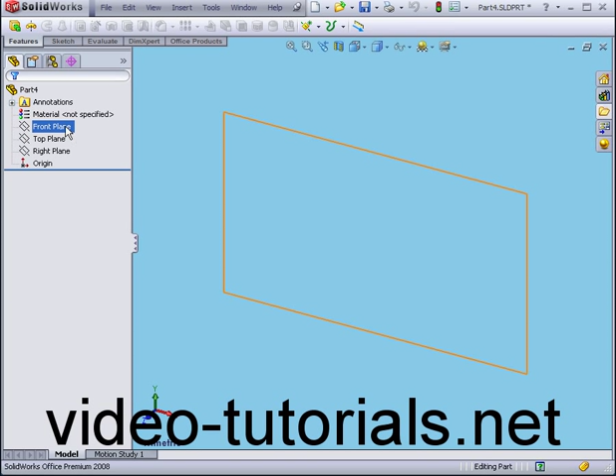First, I'm going to right-click, select Insert Sketch. Now let's activate the Line tool. And let's create a shape. Right-click, select. Let's use the 3-point arc tool now. Something like this. Right-click and select.

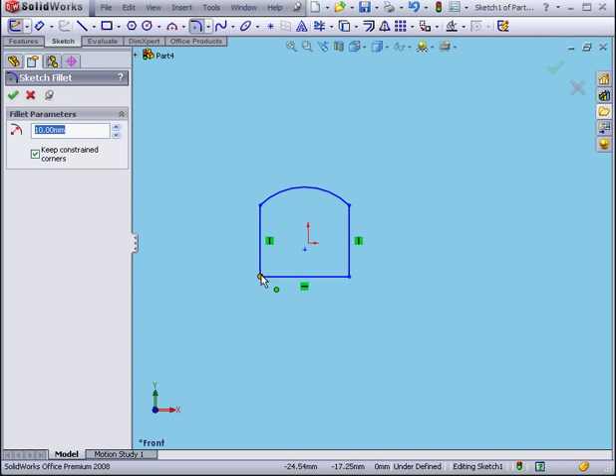Now let's apply some sketch fillets. A 10 mm radius will be fine. Let's accept. Now let's use the rectangle tool to create a rectangle. Under Options, let's check For Construction. Click OK.

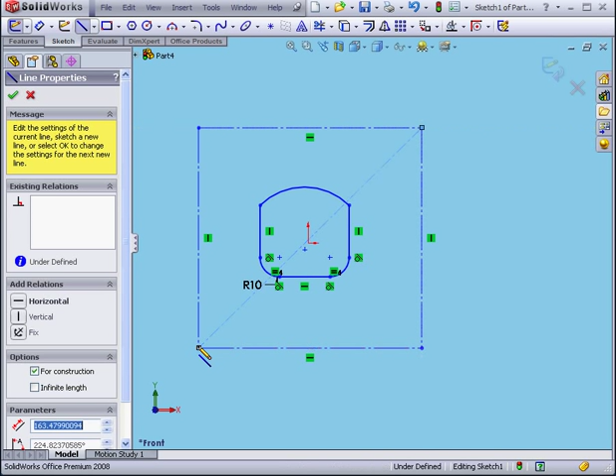Activate the Center Line command. Let's create a construction line between these two corners. Right-click, select. Next, Control-select the center point and the center line. We'll add a midpoint relation. Click OK. The origin point is now located at the center of the rectangle.

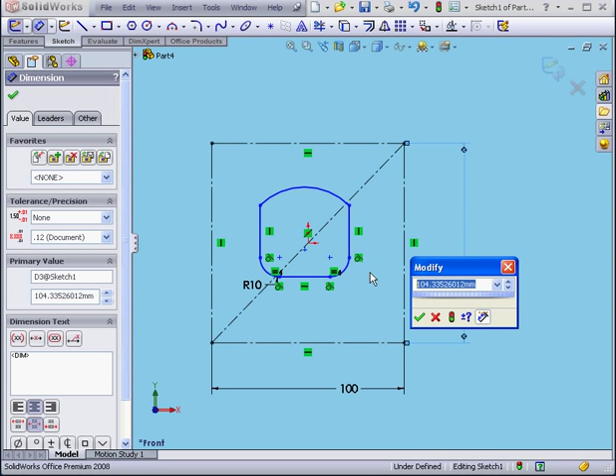Now we're going to apply some dimensions. This dimension will be, let's say, 100 millimeters. We'll make this one 120. Now let's Control-select this line, and we'll add a collinear relation.

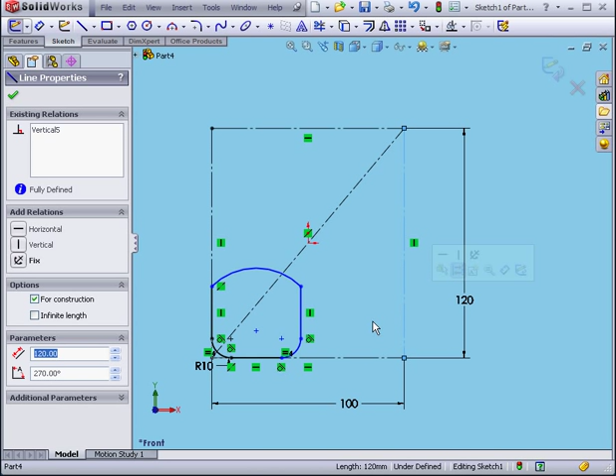Click OK. This line, and Control-select this line. Collinear. OK. This line, Control-select this line. Again, a collinear relation. OK. Now we'll select the arc and this line. We'll add a tangent relation. Click OK.

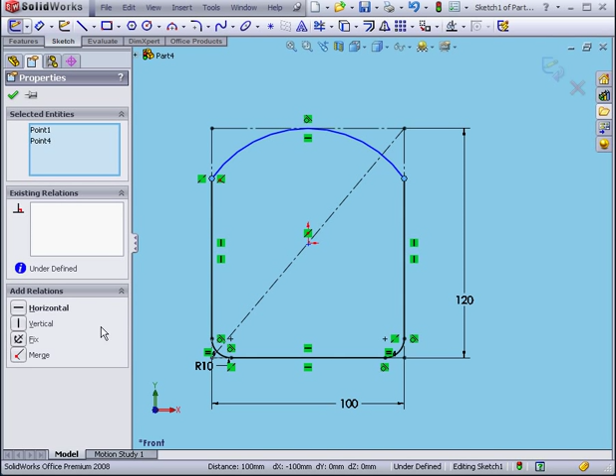Control-select these 2 points. Add a horizontal relation. OK. Let's add one more dimension. We'll make this 95 millimeters. Tab OK. Right-click and select. You see in this case that the construction geometry helped us fully define the sketch and also helped us to see how the geometric relations in the sketch were created.

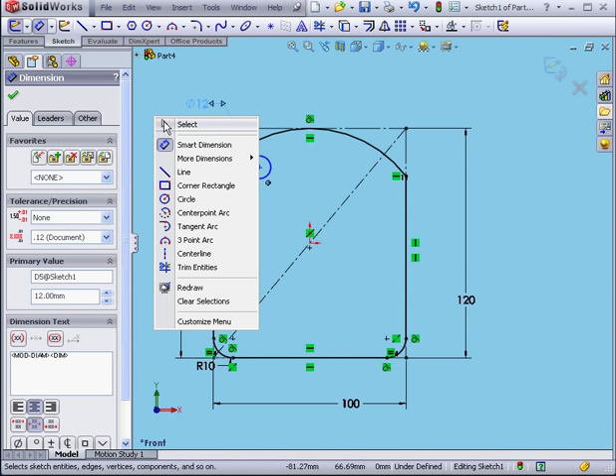Okay, let's create a circle. Right-click, select. Let's dimension our circle. We'll give it a 12 millimeter diameter. Okay. Right-click, select. Let's use the Center Line command again. Right-click, select. And let's dimension it. We'll insert an angular dimension here. 112 degrees. OK.

Right-click, select. Now let's Control-select this line and the center of the circle. Let's add a coincident relation. Click OK. Let's add one more dimension from the center of the circle to the origin point. You see here that the dimension moves based on where my mouse is hovering. When you're satisfied with the dimension's orientation, right-click and the dimension becomes locked. You'll see the lock sign on the mouse.

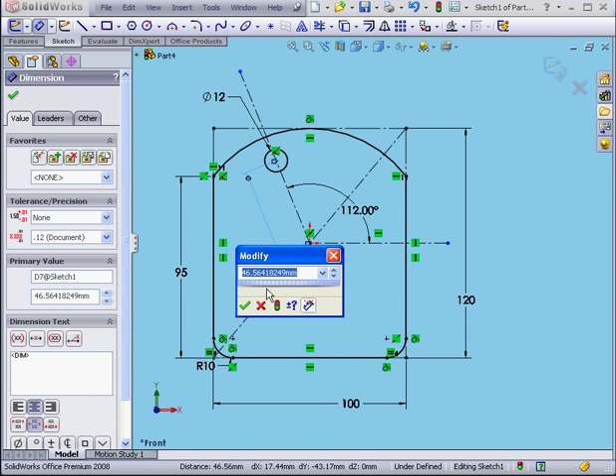If you want to unlock the dimension, just right-click again and the dimension becomes unlocked. Again, let's right-click. And left-click when you're satisfied with the position of the dimension. Let's enter 45. OK. Right-click, select. Now let's delete this angular dimension. Activate the Point tool. Let's drop a point right about here.

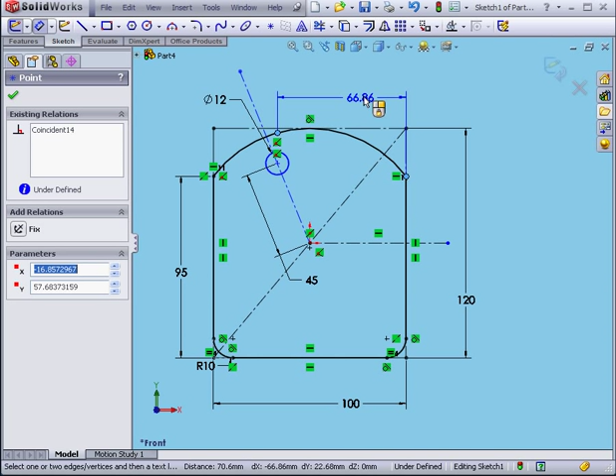Right-click, select. Let's say I want the position of this construction line to be driven by the distance along this line from this point. Let's activate the Smart Dimension tool. Select this point, and to create a dimension along this line, select this line. Left click. Let's say the distance is 75 millimeters.

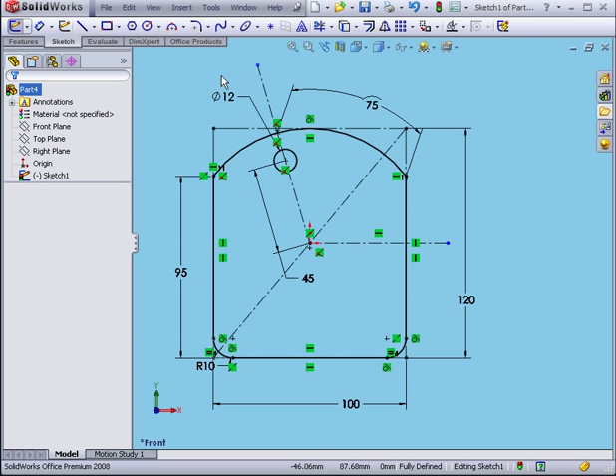OK. Right click, select. Now I'll Control-select this point and this line. Add a coincident relation. OK. This is another example of how to use construction geometry to constrain and better visually understand your sketch. Let's exit the sketch. Activate the extrude tool. Something like 3 millimeters. OK. This concludes our tutorial on using construction geometry.